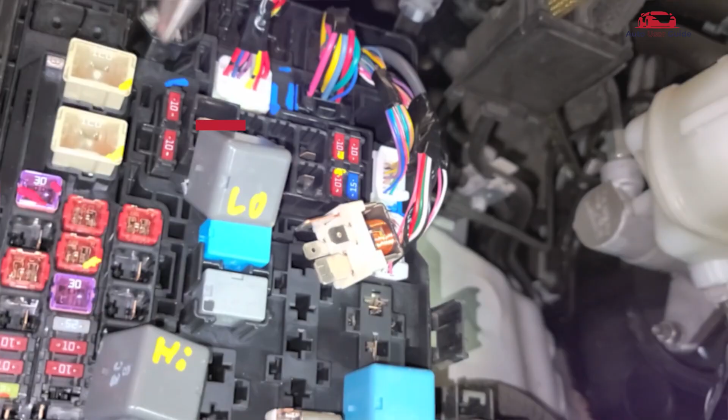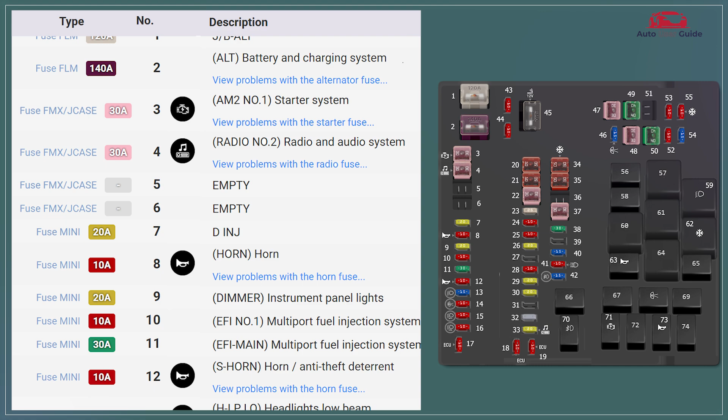Engine compartment fuse panel. The engine compartment fuse box houses essential fuses and relays that protect and control major vehicle systems, including the engine and headlights. It is designed for easy access and maintenance, typically located near the battery.

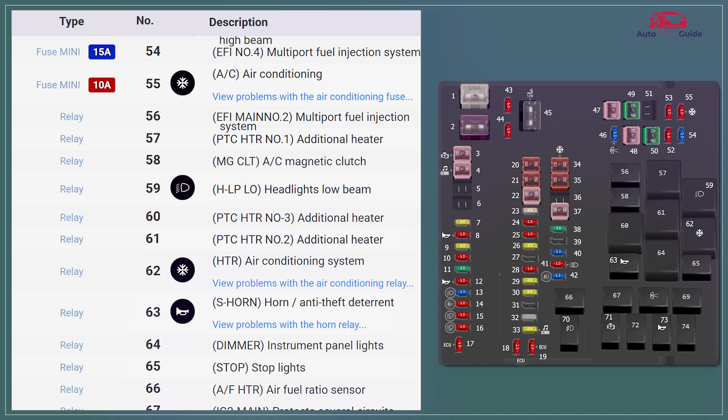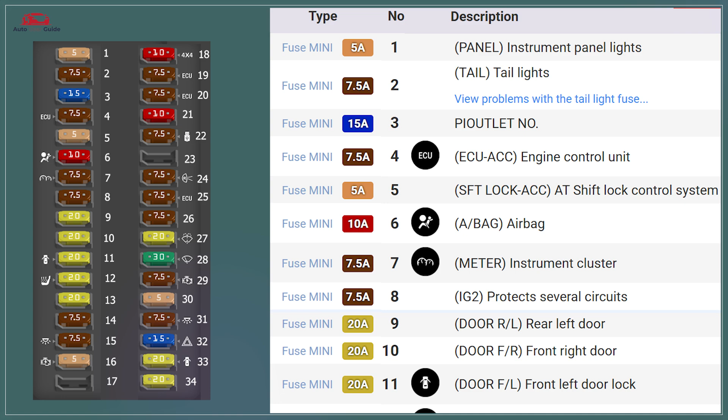Passenger compartment fuse box. The passenger compartment fuse box protects essential interior electrical components like power windows, dashboard lights, and the infotainment system. It is conveniently located under the dashboard or near the glove box for easy access.

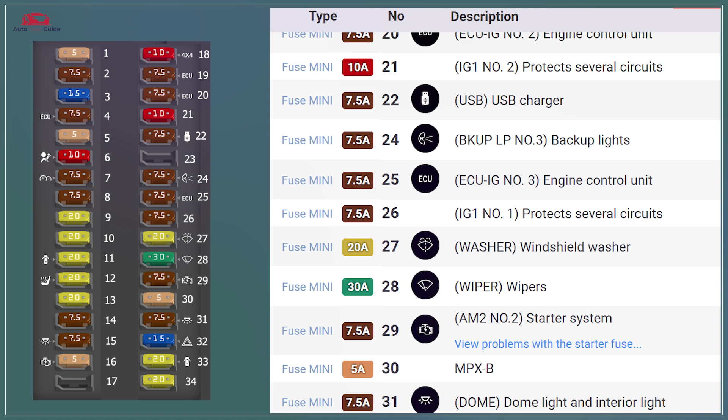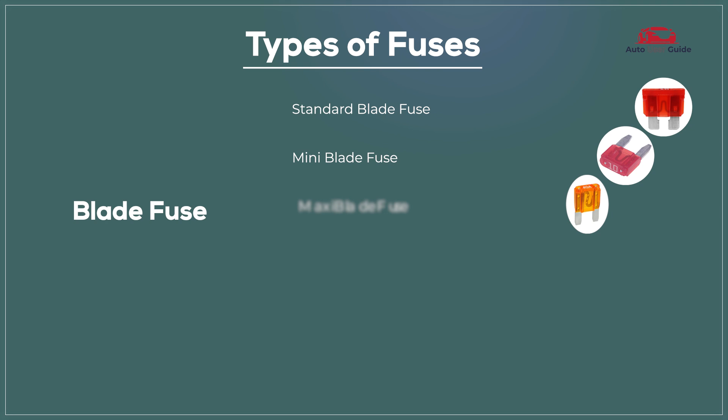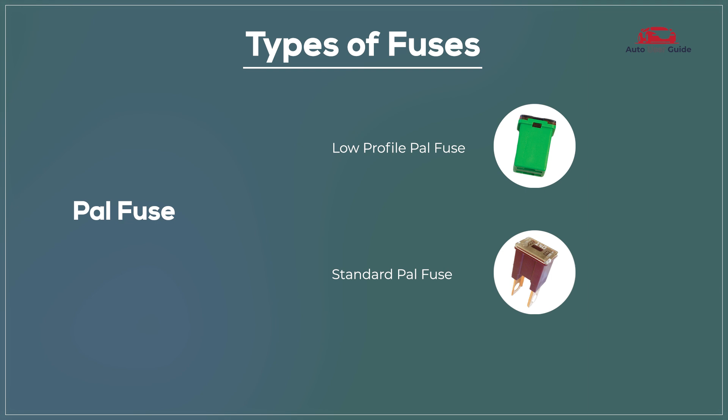Types of fuses: blade fuse, standard blade fuse, mini blade fuse, maxi blade fuse, micro 2 fuse, micro 3 fuse, J-case fuse, glass tube fuse, AGC fuse, SFE fuse, ceramic fuse, Bosch fuse, DIN fuse, PAL fuse, low profile PAL fuse, standard PAL fuse, link fuse, mega fuse, high amperage link fuse.

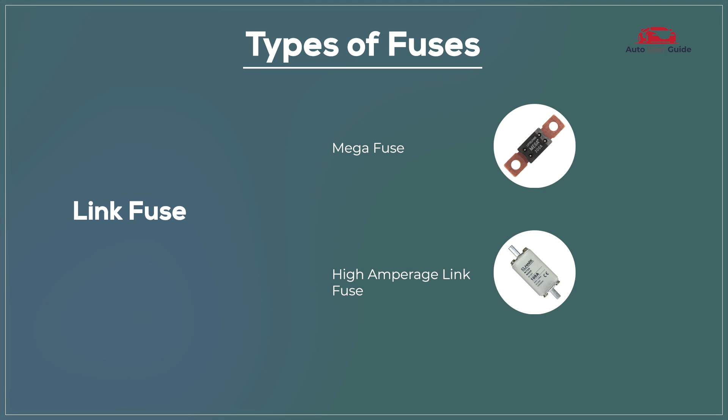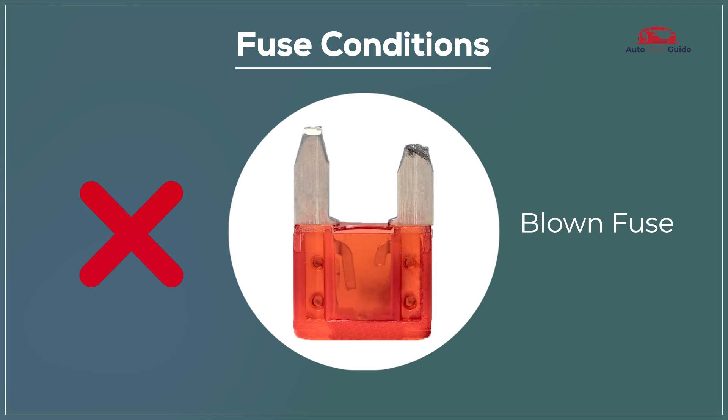Fuse conditions: a blown fuse means it's no longer functioning and needs replacement, while a perfect fuse is in good working condition and performing as expected.

How to change fuses: turn off the vehicle, locate the fuse box, identify the faulty fuse, remove the faulty fuse, inspect and obtain a replacement, install the new fuse, and test the replacement.

Safety precautions: disconnect the battery, wear protective gear, use proper tools, check for correct amperage, and avoid water exposure.